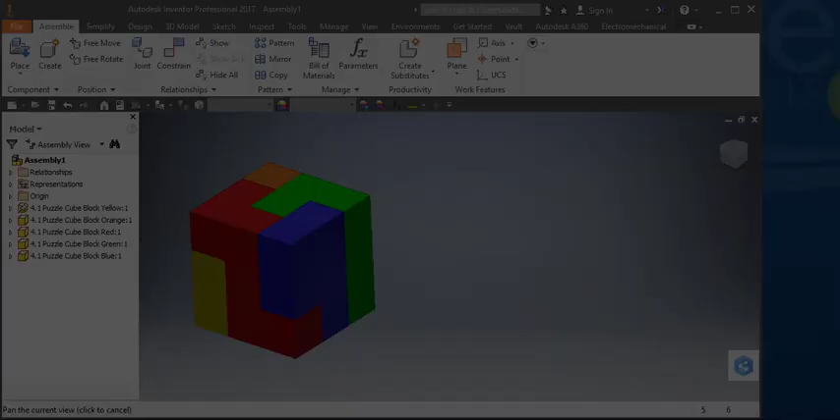In this video, I'm going to show you how to assemble the puzzle cube. I'm going to start out by placing the yellow part first.

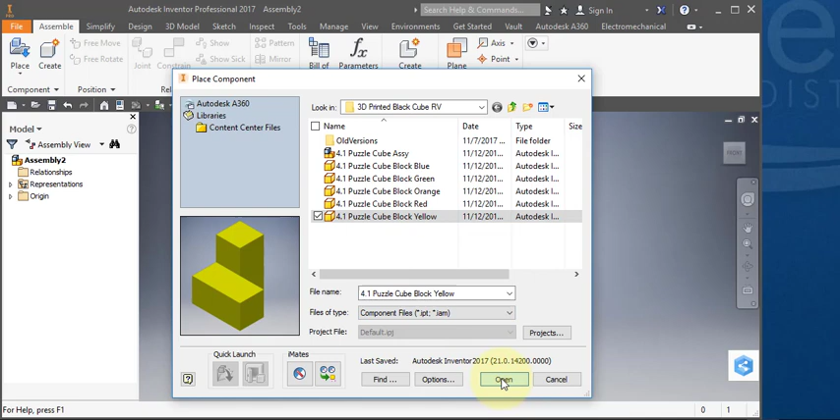Start out by creating a new assembly. We're going to place our first part, come up to this menu, pull this little menu down and select Place. Navigate to your Documents folder and find the yellow part that you created earlier. Select Open. Right mouse button, place grounded at origin. Right mouse button, OK.

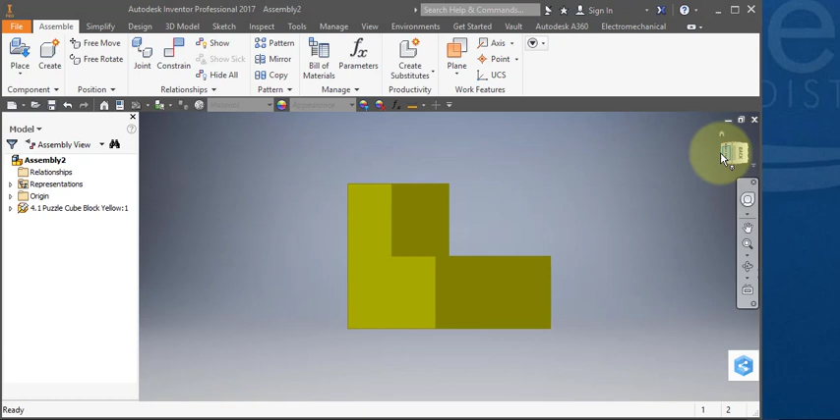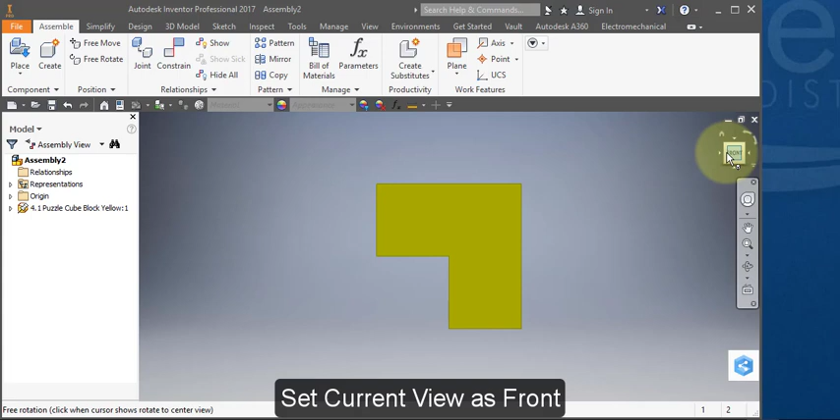Now look at your front view and navigate around such that this is your front view. Should look like this, with that as your front view. Select your context menu and set current view as front. So now if you look on your view cube, this view is your front view. And if you look at your ISO, it should look like that.

I'm going to place my second part, the orange part. Place it down and right mouse button OK.

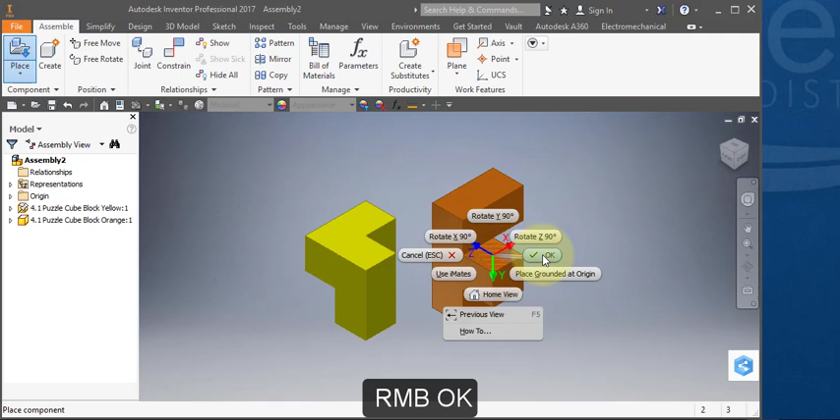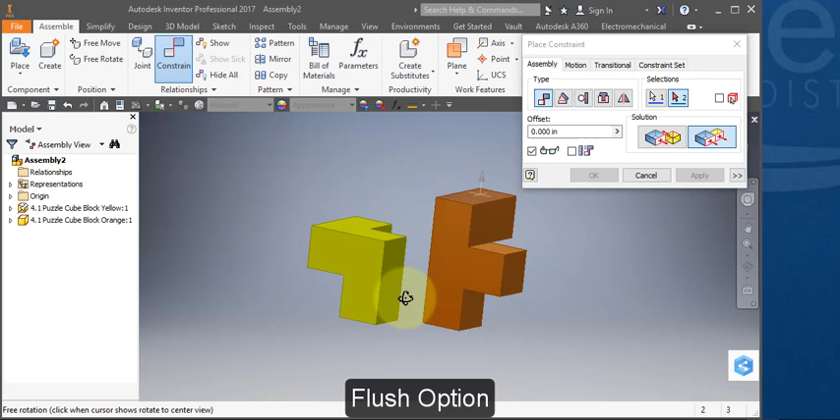I'm going to use this command, it's called Constraint. In my constraint menu, I'm going to select this option, Flush. It should be highlighted blue. I'm going to point to this face, and I want it pointing in the same direction as this face. Select Apply.

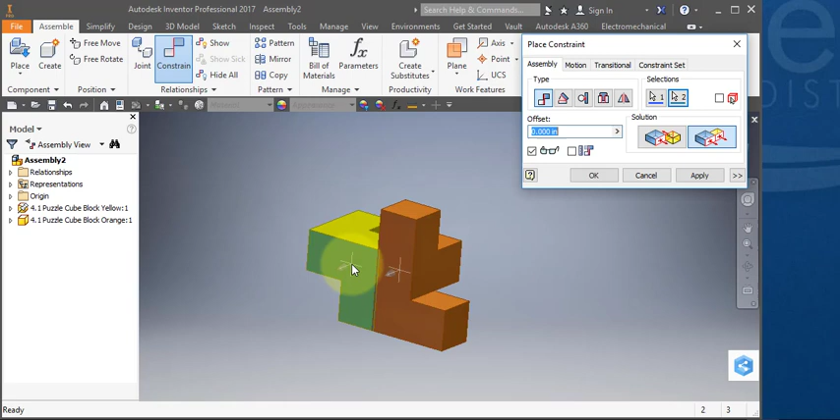Let's do the same command. I'm going to select this face. You notice the arrow pointing away from that face, and I'm going to select this face and apply. I'm going to hit cancel this time.

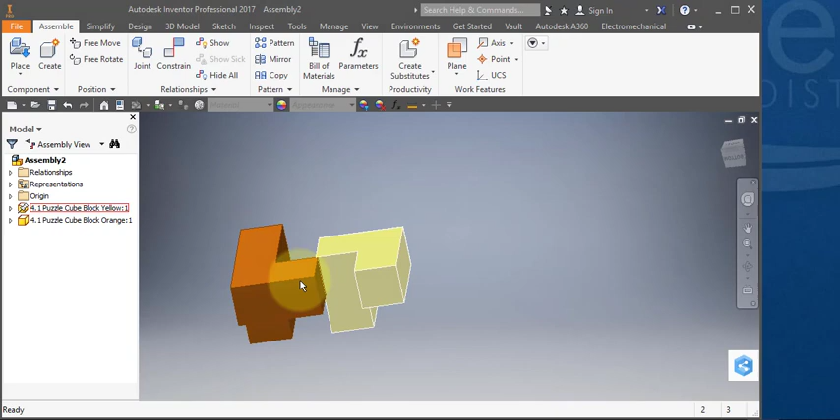At any point in time, I could move these parts. Notice I could grab the part and move it around. Notice also that I've locked it in two directions: this face is flush with this face, and this face is flush with this face. And I want to lock it in place by having this face touching this face. So I'm going to use the constraint command again.

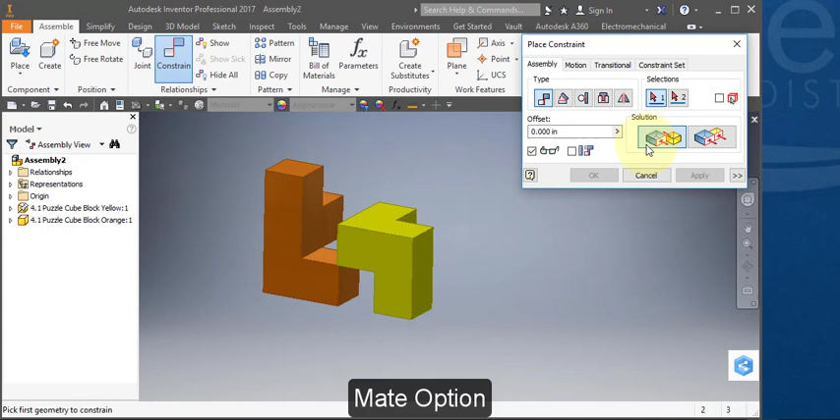And this time I want to use this option, it's called Mate. This should be highlighted blue. I'm going to point to this face and this face and select Apply and Cancel. Now the parts are locked in place and they cannot move. The yellow part was grounded because we grounded it when we first placed it. You notice there's a little pin next to the yellow part telling me that it's grounded.

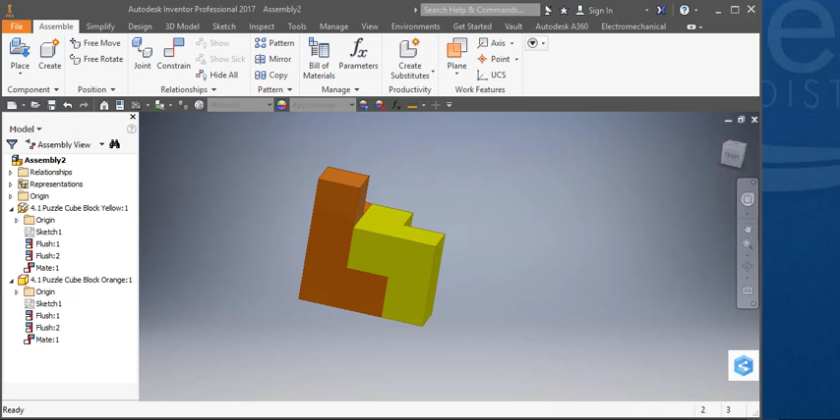Now at any point in time, my constraints do not work, or I've made a mistake. You can come to your browser and open up your part. In this case, I just opened up the orange part, and you notice here are your constraints that you created. I created 3. At any point in time, I can delete these constraints and delete all 3 and start over if, for whatever reason, my constraint commands are not working. If you have problems, if you run into problems, just delete all your constraints one at a time and then start over.

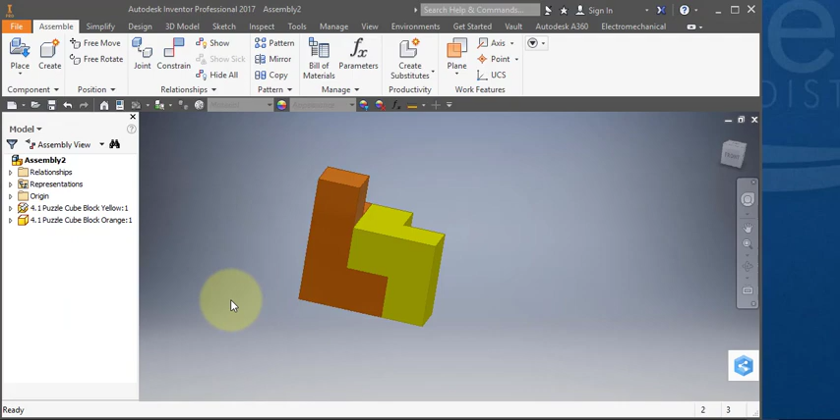Next, I'm going to place the red part. I'm going to go to Place, select the red part, open it, place it, right mouse button, OK.

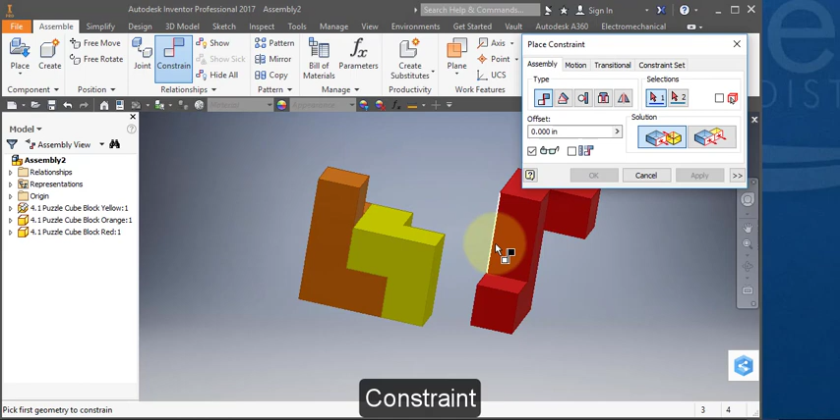And go back to my constraint command, and I want to choose this one more time, the flush command. Make sure this is highlighted blue. Rotate it around, and I'm going to point to this surface and this surface. I want them pointing in the same direction. Select Apply.

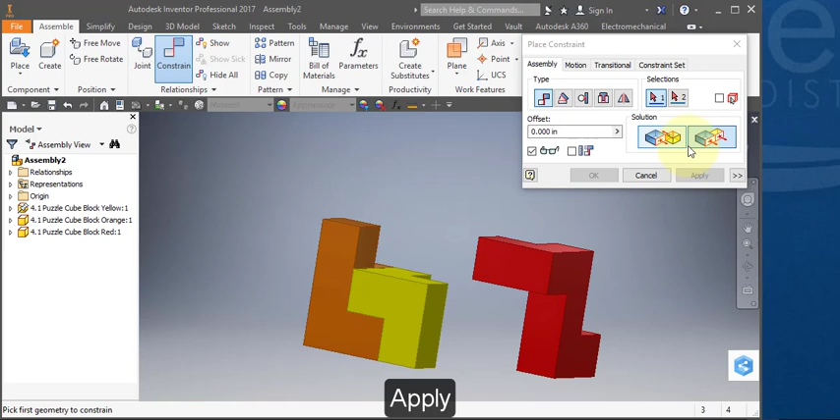Using the same command, flush, I'm going to point to this surface and this surface. Select Apply and select Cancel. Notice I can move this part, but only in one direction. I constrained this surface flush with this surface and this surface flush with that one.

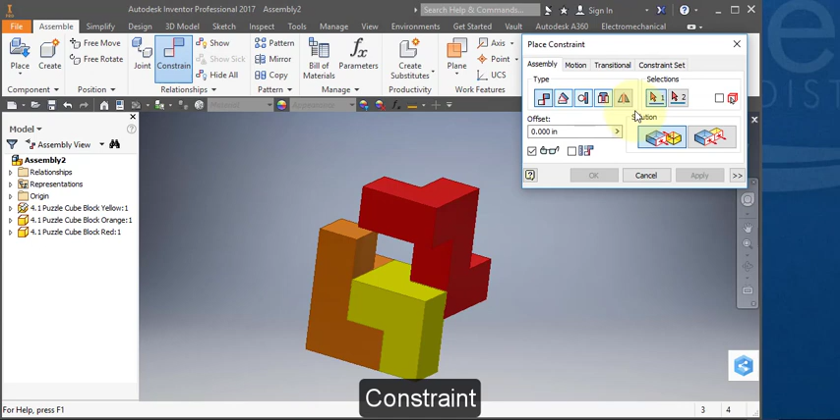Now I want to mate this surface down to this surface. So I'm going to create another constraint. This time make sure it says you've highlighted the mate option. I'm going to point to this surface and to this surface. Apply, cancel. So there's my assembly. Your parts should look like this.

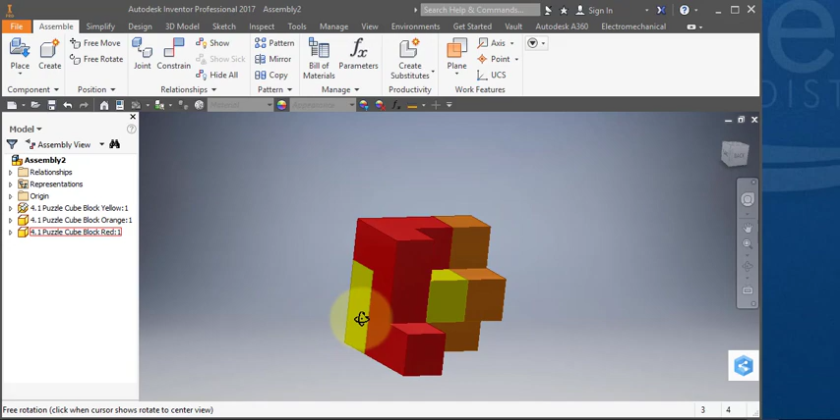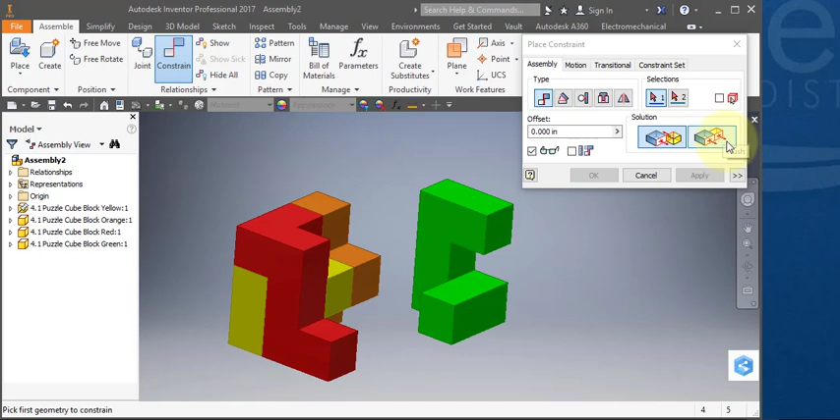I'm going to place the green part. Place it, right mouse button, OK. I'm going to select Constraint, select the flush option, and point to this face and to the top of the red. Select Apply.

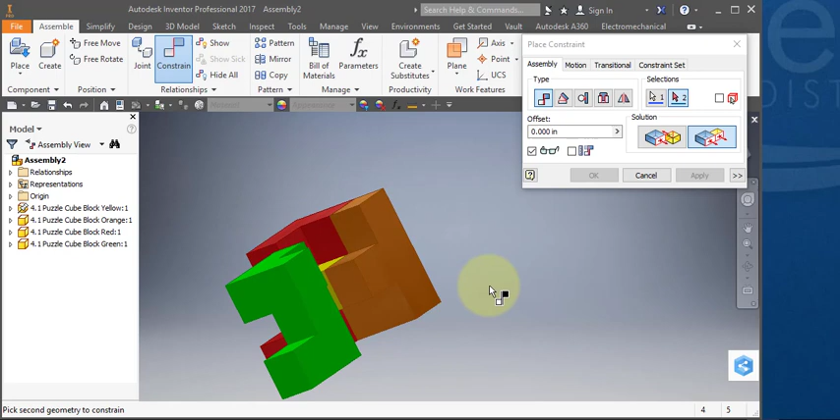Still in the flush command, I'm going to select this surface and this surface. Select Apply, and now notice I've constrained - I'm going to hit Cancel. I can move my green block in and out. Cannot move it up and down because these two surfaces are flush, and I cannot move it side to side because these two surfaces have been constrained flush.

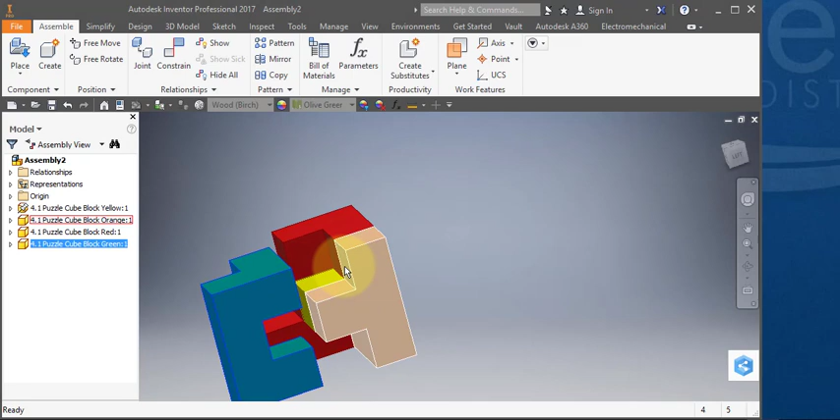Now I want to mate these two surfaces, that surface and that surface. So I'm going to go back to my constraint, and I'm going to make sure that the mate option is highlighted, and I'm going to point to this surface and to this surface and select Apply and Cancel. Now notice that my green part is locked in place. My assembly should look like this.

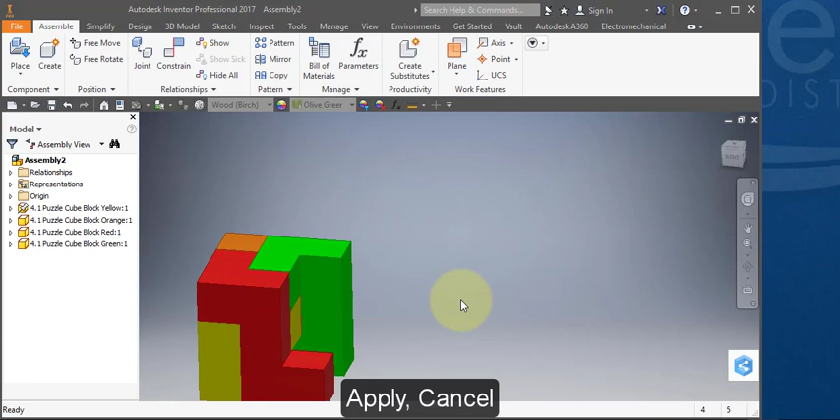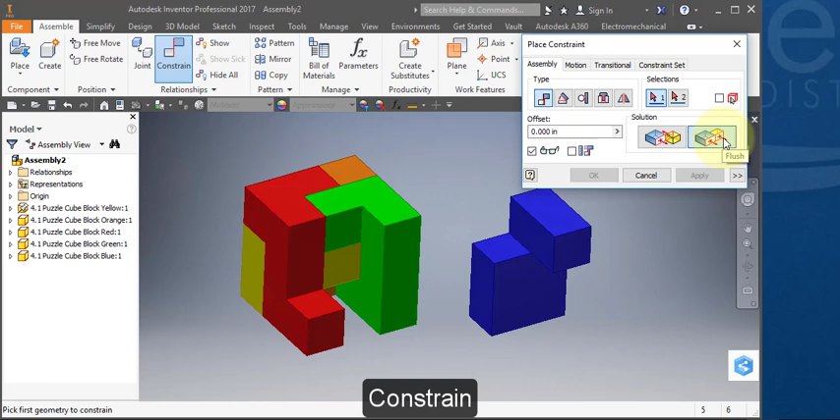I'm going to place my last part, the blue part. Select Blue, Open, place it, right mouse button, OK. Select Constraint, make sure you have the flush option highlighted, and I'm going to point to this surface and this surface. Select Apply.

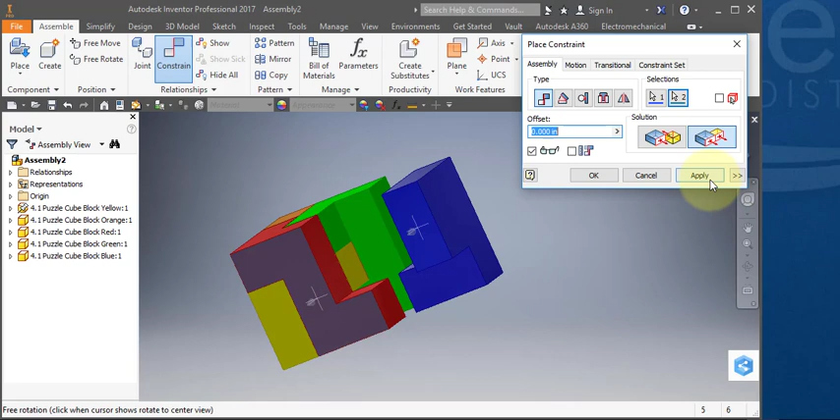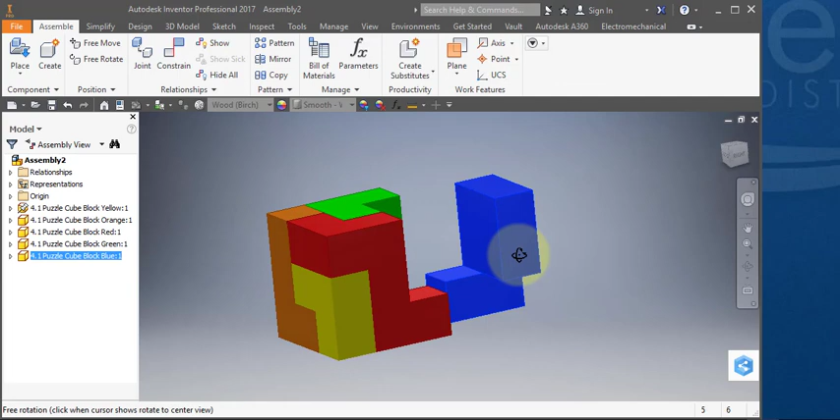I'm going to point to this surface and this surface. Apply and Cancel. Now notice that my blue part is constrained on two axes. This surface here is flush with this surface, and the top surface of the blue part is flush with the top of the red part. Now I only need to mate this surface here with one of these surfaces here.

So I'm going to go back to my constraint command. Make sure that the mate option is selected. Point to this surface and to this surface and select OK. Now all my parts are completely constrained. They can't be moved, and my assembly is complete.

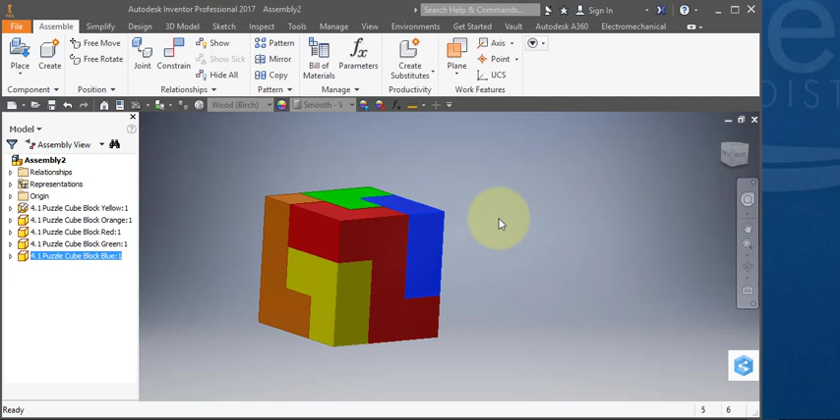I'm going to save my assembly. I'm going to call it 4.1 Puzzle Cube Assembly. Save it - I'm not going to save it at this time, I've already done it earlier. And in the next video, I'll show you how to create the drawing for this puzzle cube assembly.